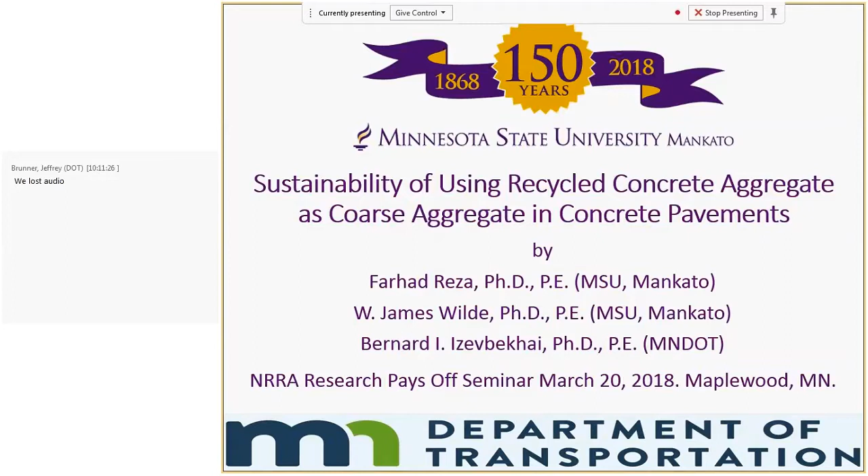So our topic today is of interest to us. It was from this Office of Materials and Road Research, our concrete research section, that we developed the mathematical method for quantifying the enhancement of the interfacial transition zone in concrete, called the aggregate avoidance index method. We developed that from our internal research in recycled concrete aggregate in concrete.

Today, going further, we're going to have a presentation from Professor Farhad Reza from Minnesota State University, Mankato, where he is a professor in the civil and mechanical engineering department. He has been in that faculty for about 9 years now, and prior to that, he was at Ohio Northern University for 8 years. He obtained his BSc in civil engineering from University of Iowa, and his master's and PhD from Clarkson University in New York.

Dr. Reza's research interests include concrete materials science, pavement performance modeling, and non-destructive testing. He is also a registered professional engineer in the states of, I believe, Minnesota, Ohio, and New York. Correct me if I'm wrong. All right, so make welcome Professor Farhad Reza.

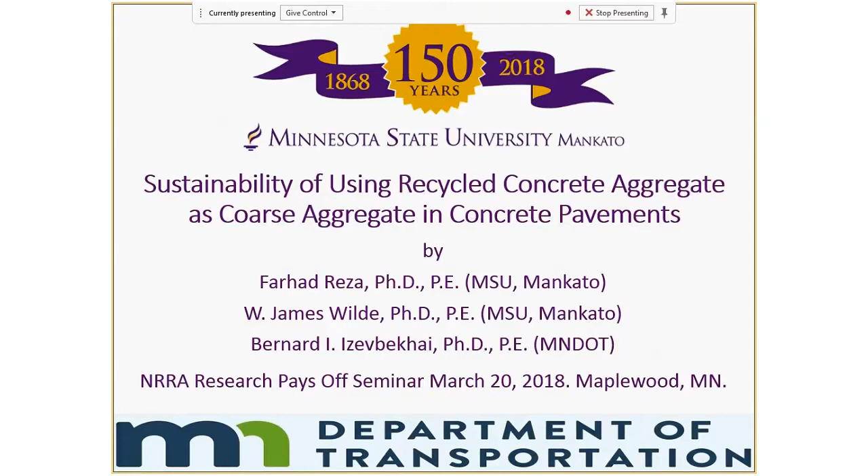Sustainability is at the forefront of everything that we do nowadays. A definition of sustainability, for example, you can see from the Federal Highway Administration's INVEST program, which is a method for rating sustainability of transportation projects. The goal of sustainability is satisfaction of basic social and economic needs, both present and future, and the responsible use of natural resources.

Also, for those of us who are civil engineers, the American Society of Civil Engineers Code of Ethics, fundamental canon number 1, says that engineers shall hold paramount the safety, health, and welfare of the public. And the second statement there is that they shall strive to comply with the principles of sustainable development. So it's an important topic for us.

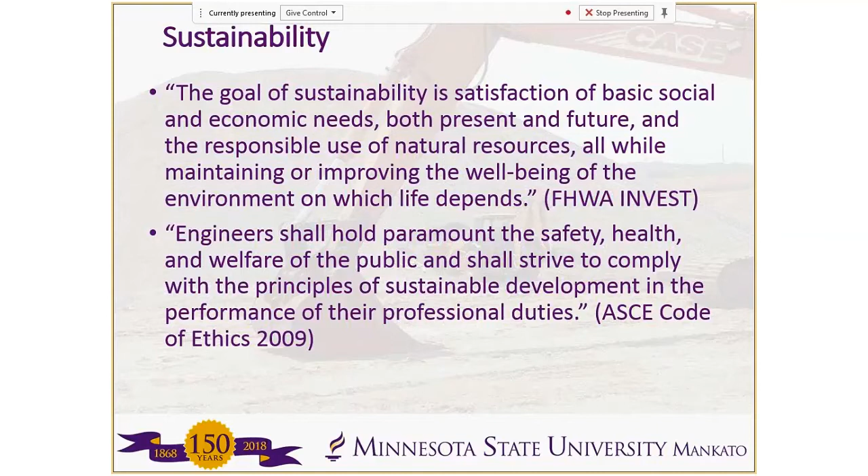ASCE also gives some guidance about what this means. As an engineer, if you want to consider sustainability, what are the steps you should be considering? They gave some guidelines, steps to a sustainable project. Number one is to perform a life cycle assessment from planning all the way to removal, avoid depletion of resources, plan for resiliency, and validate the applications with some metrics or ratings.

Also, one term that's used is the triple bottom line of sustainability, which is economic, environmental, and social performance. This term got coined in the past—big corporations used to report basically their financial statement, so they used to report only the economic performance. But Elkington in 1998 suggested that corporations should also, in addition to the financial statements, look at environmental and social performance. From there, this term came in, the triple bottom line of sustainability.

So in today's talk, I'm mainly going to focus on the economic and the environmental part.

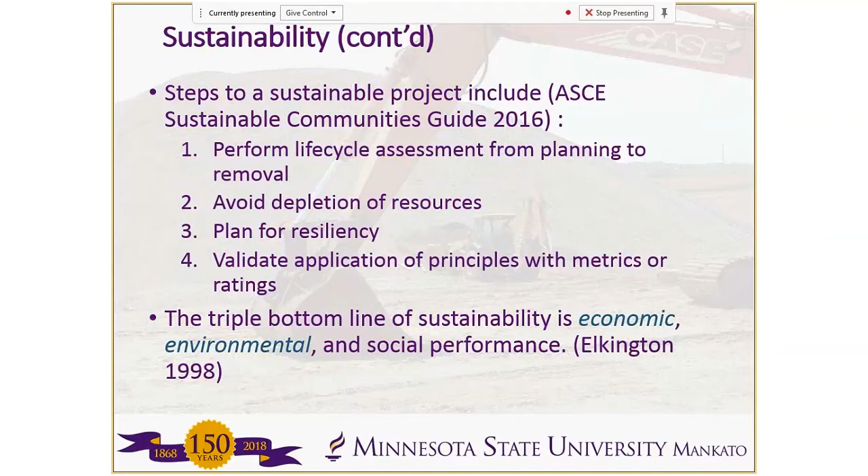The objectives in this project here were to look at several alternatives for a realistic pavement project. The idea was to try to get an equivalent performance between a pavement that's made with recycled concrete aggregate and a pavement that's made with conventional aggregate. We'd evaluate the economic performance of the different alternatives using a life cycle cost analysis, and also look at the environmental performance of the different alternatives using life cycle assessment.

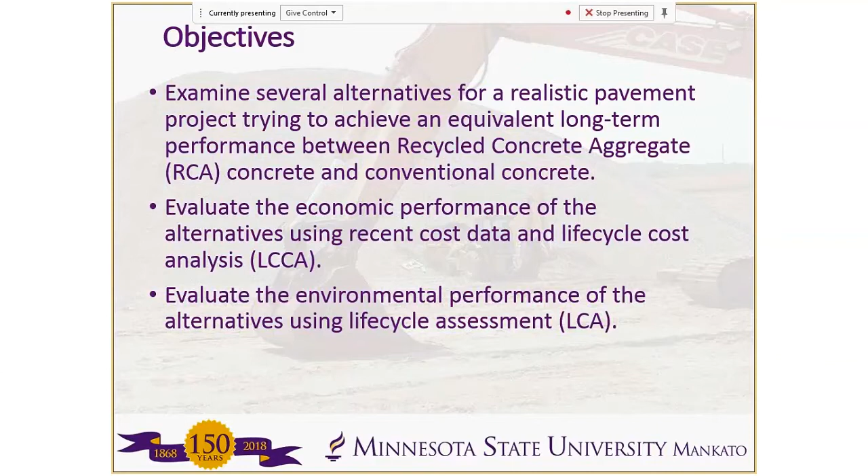Just to give some background, in the US we consume a lot of aggregate annually in construction, about 2 billion tons annually. A common estimate of how much recycled concrete is available as aggregate is about 5%, or 100 million tons, so it could make a substantial contribution to aggregate consumption.

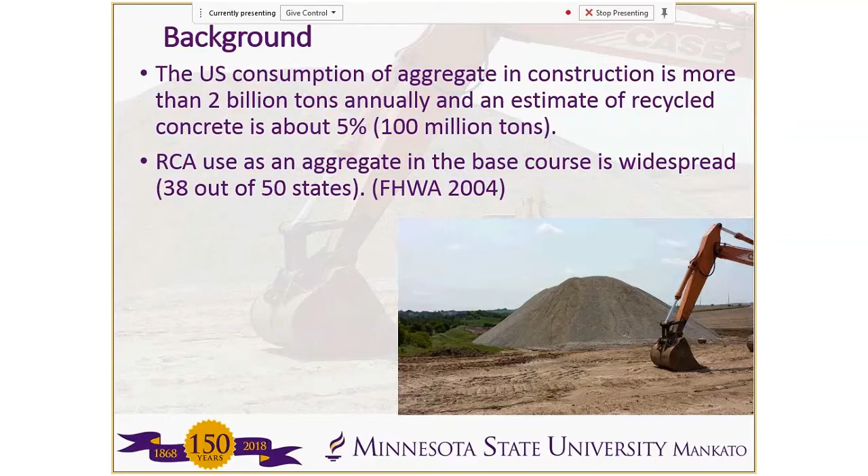It's already a pretty common practice in a lot of states to use recycled concrete aggregate in the base course of pavements. For example, in an FHWA study in 2004, 38 out of 50 states were already doing that practice. But it's not that common to use it in the concrete layer itself.

Back in the 1980s, across the US, there were several trial projects built, and Michigan had the most of them, about 30, but Minnesota was also one of the highest in number of those trial projects. Subsequently, Michigan placed a moratorium on using recycled concrete aggregate in concrete in 1991 because they were observing some mid-slab cracking. Further investigations later on actually attributed it more to design problems like inadequate joint spacing, more so than the actual aggregate issues.

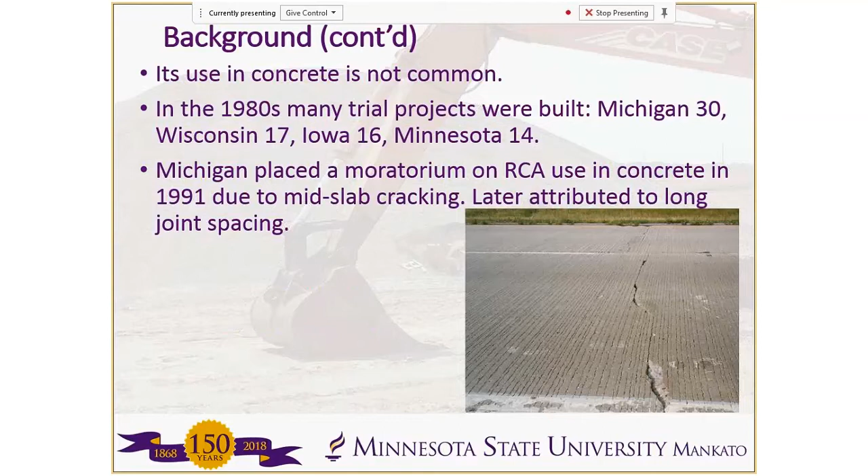One of the more recent constructions was at MnDOT, a two-lift construction performed at the MnRoad facility in 2010. With the two-lift approach, the idea is that you can use a lower quality concrete on the lower lift and a higher quality concrete on the top lift. So a thicker, lower quality concrete with recycled concrete aggregate was placed on the bottom, and a thinner layer was placed on top.

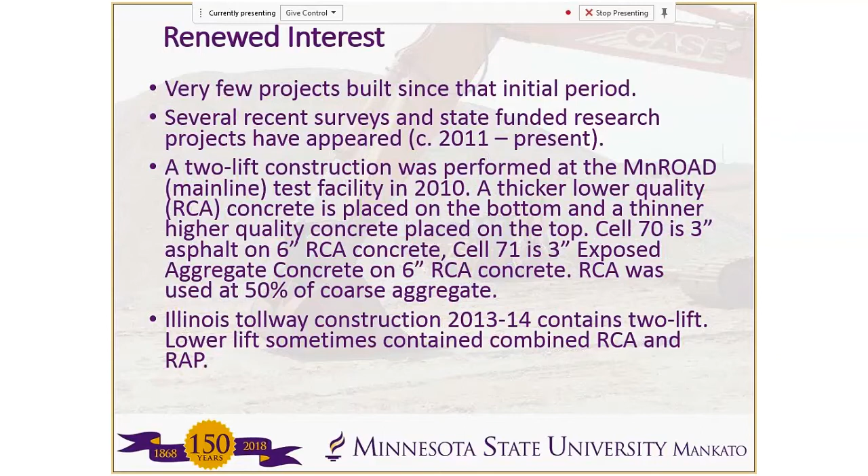Also in the Illinois tollway construction in 2013, that was also a two-lift construction, and in some portions the lower lift also contains recycled concrete as well as recycled asphalt.

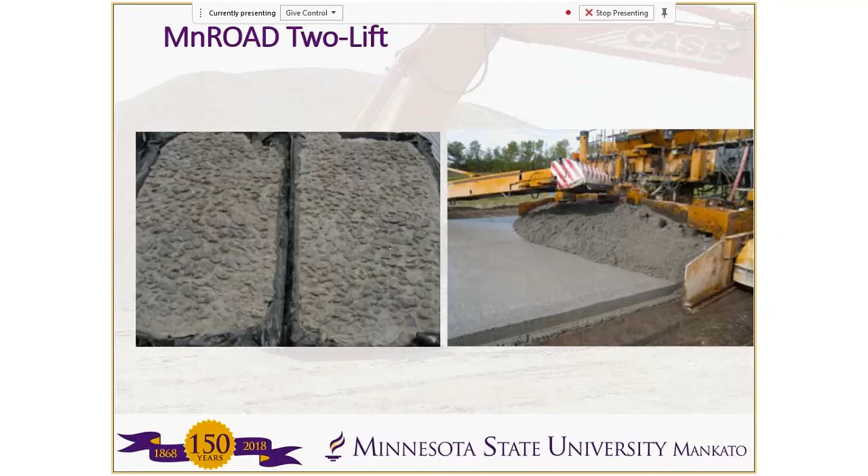The mechanical properties of recycled concrete aggregate have a huge part to play in the performance of that concrete. Most of the literature suggests that you don't use the fines, the recycled aggregate fine material, because that causes a lot of workability issues and some durability issues with the concrete.

Compressive strength of concrete using recycled concrete, what's been reported in the literature, is typically about 20% lower than if you used natural aggregate. But if you're using a lower water cement ratio, the difference might be even more pronounced at a lower water cement ratio.

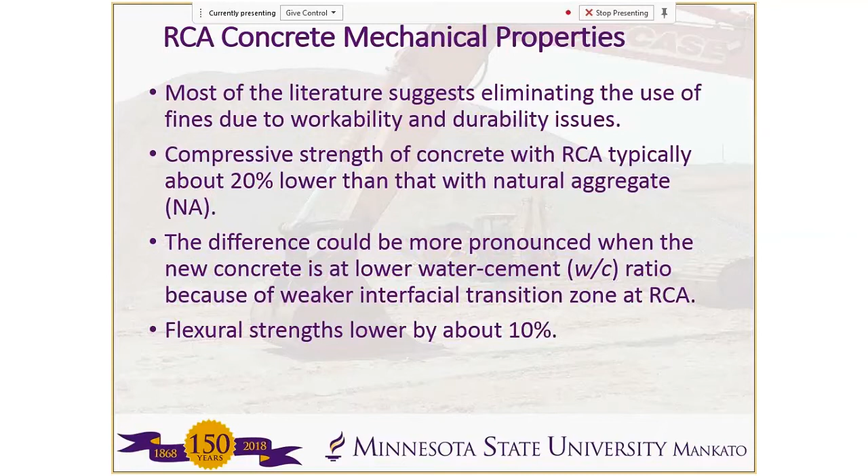Bernard mentioned the interfacial transition zone earlier on - the recycled aggregate already has a weaker interfacial transition zone than new concrete. This could lead to a bigger difference in compressive strength when you have lower water cement ratios. Flexural strengths have typically been reported to be about 10% lower. Modulus of elasticity of the concrete is about 20 to 40% lower, and coefficient of thermal expansion is about 10 to 30% higher with recycled concrete.

On the positive side, freeze-thaw resistance may actually be increased when using recycled concrete because you already have some entrained air within the aggregate itself. Also, when you crush this to a smaller size, D-cracking susceptibility may also be less. ASR potential may be higher with recycled concrete. So in general, most of the mechanical properties seem to show that recycled concrete aggregate would perform not as well as conventional aggregate concrete.

Most of this data and experimentation were done earlier on, mainly in the 1980s, and concrete mix designs have changed quite a bit since then. So we decided to evaluate a high performance concrete mix with a relatively low water cement ratio of 0.37. For the natural aggregate, we used limestone aggregate, cementitious content was 585 pounds per cubic yard, and we used 30% fly ash substitution.

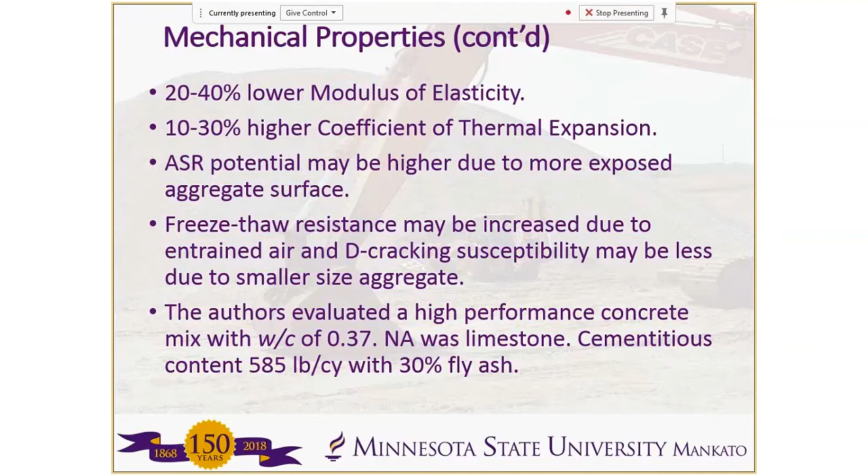The observed mechanical properties from those experiments for 50% and 100% coarse RCA substitution: compressive strengths were about 32% and 43% lower. If you remember, I said if you use lower water cement ratio, you would expect to see more of a difference between compressive strengths. Flexural strength was about 17 to 20% lower. Drying shrinkage was 1% and 32% higher, and coefficient of thermal expansion was 1% and 11% higher.

We also did some other experiments to see if we could adjust the mix design such that the mechanical properties are somewhat similar. We found comparable properties if we lowered the water cement ratio to 0.36 for 50% RCA, and to 0.35 for 100% RCA. We had to increase the cement content slightly so as to keep the paste volume the same.

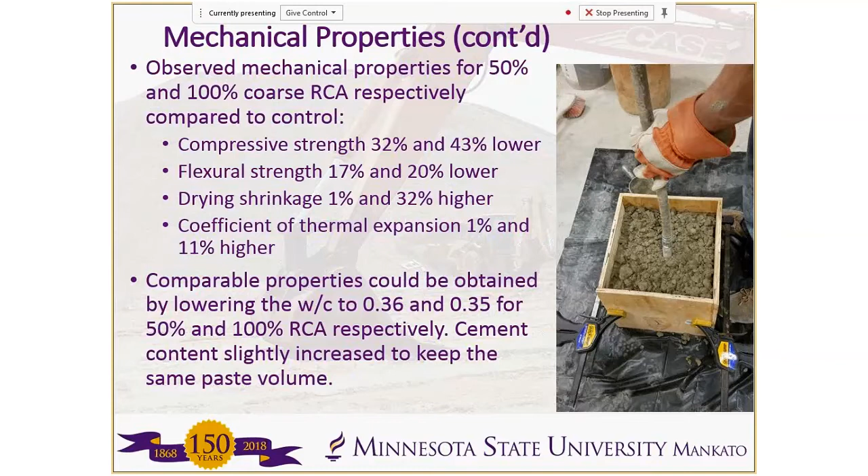So as we've seen, the mechanical properties in general, if you just substitute the recycled concrete aggregate for the natural coarse aggregate, are expected to be inferior unless you make adjustments for that. So we wanted to see, does that hold true in practice?

All these pavements that were built - we had a lot of them in Minnesota built in the 1980s and 90s. We wanted to look at how they performed, look at their long-term performance record, and compare it to similar concrete pavements built around the same time, because we know the specifications change from time to time, so we have to keep it within the same time period. We also looked at the same range of traffic on the pavements as well.

This is a map showing the locations of those pavements with RCA concrete in Minnesota. There's about 212 miles of those pavements that were built.

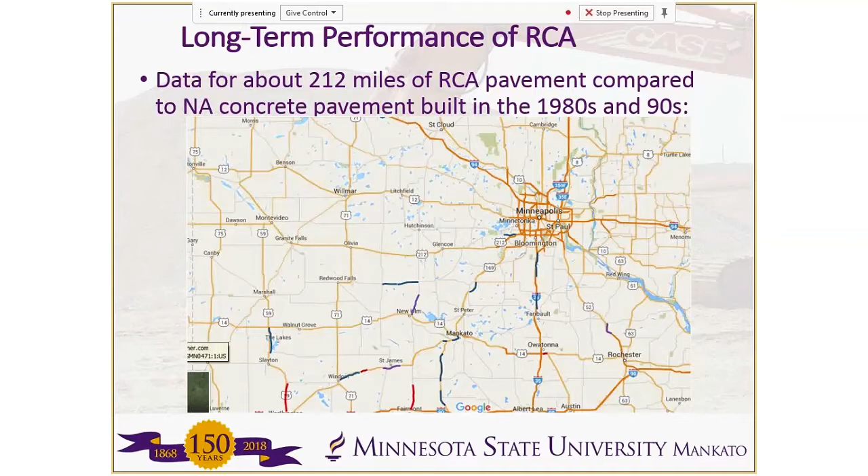So we studied the different pavement performance indexes. MnDOT has a nice database - they collect annual records of ride quality, surface distress, pavement quality, and so on. We tracked those, as you can see on these graphs, looking at those different indexes. This shows the average values over time elapsed since construction, for both the recycled concrete aggregate on top and the conventional aggregate concrete on the bottom.

In both cases, we see the ride quality index is the lower curve, so ride quality tends to deteriorate the fastest out of these indexes. A typical trigger value for major repair is about 2.5 on the ride quality index. So we can see that RQI in most cases seems to be the one that will deteriorate first and cause the trigger for major repair.

Also, just to point out, towards the end it looks like on those graphs there's a slight uptick - it's actually getting better. The reason is that by that time some pavements have already been repaired, so the index values are going up higher, which makes it look as if they're improving with time at the end.

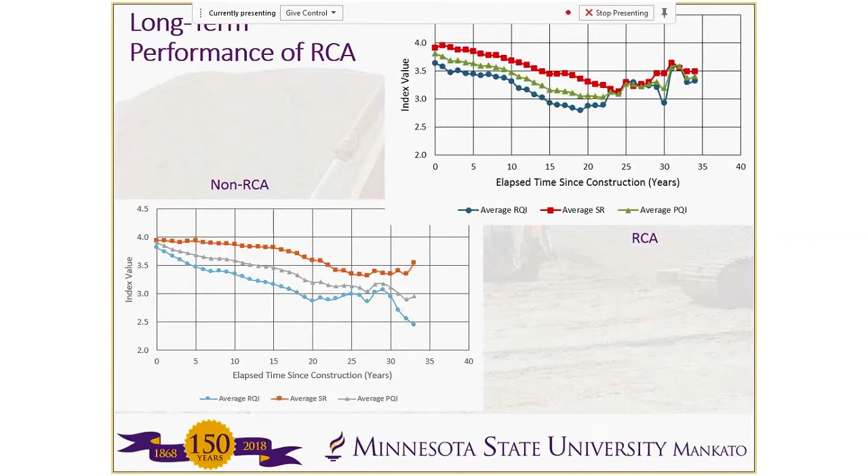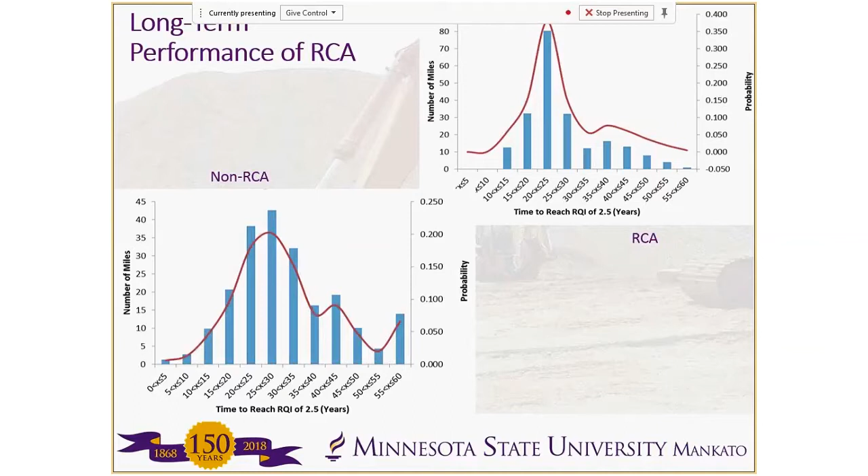So we studied the time it took for the pavements to reach a terminal RQI value of 2.5. As we expected, in general the RCA pavements performed a little bit worse than those made with natural aggregates. Based on those comparisons, the mean time to the first major concrete pavement rehabilitation was about 27 years for the RCA pavements and about 32 years for those made with natural aggregates.

For the minor repairs, we found that by the time pavements get to major CPR, most commonly they undergo 2 minor repairs along the way, and those times were fairly similar for both: 16 years and 21 years for the RCA pavements, versus 18 years and 23 years for the natural aggregate pavements.

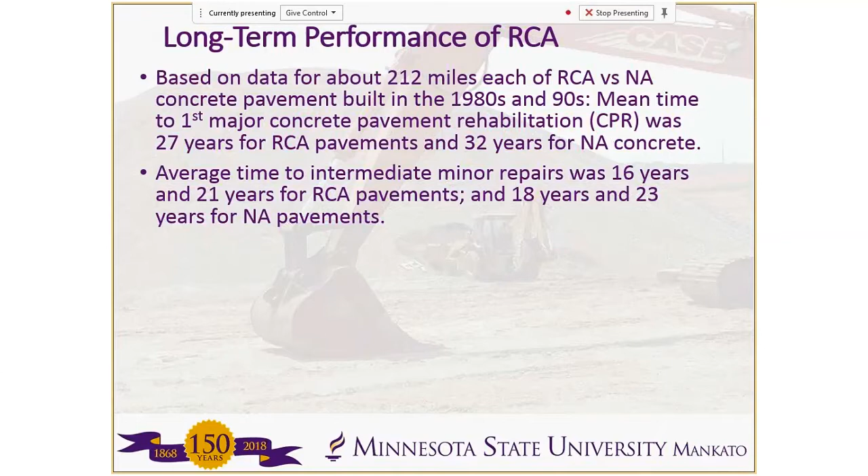Now that we know, based on mechanical properties, if you simply substitute in the same mix design, we don't expect the RCA is going to perform as well. So one option is to carefully control the concrete mix design such that you might get similar performance. Another option might be to actually use increased thickness to compensate for the performance.

So we also looked at this: what about increasing the pavement thickness if you're going to use recycled concrete aggregate? For this, we relied on some fatigue data. As I mentioned earlier, there's a lot of research on static properties, compressive strength, flexural strength, and so on, but not that much research on the dynamic or fatigue properties.

In one paper, we found that the stress level was 0.58 if you're using natural aggregates, 0.56 for 50% RCA concrete, and 0.5 for 100% RCA. The stress level is just the maximum tensile stress that the pavement's going to feel compared to the flexural strength, relative to the flexural strength of that pavement.

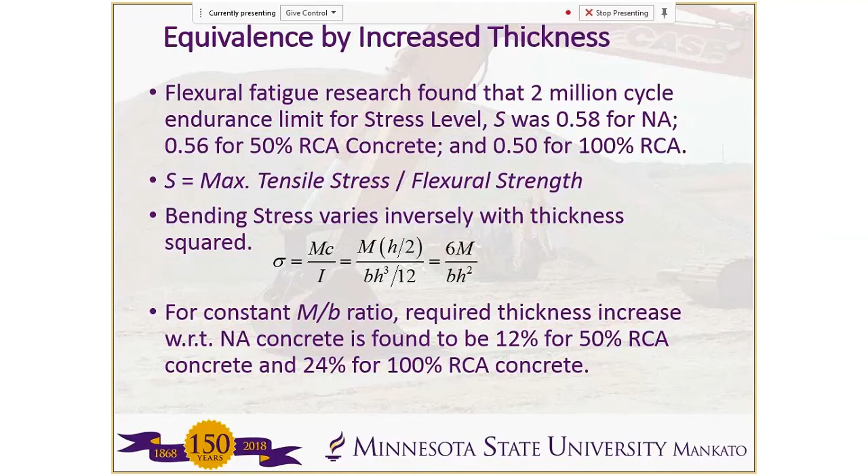Moving on to some of the sustainability aspects, looking first at the economic aspects. Some of the past studies, Florida DOT did an assessment of recycled concrete versus limestone aggregates, mainly for use in base courses. They found a reduced environmental impact in processing energy and disposal, so the RCA had better environmental performance. As far as costs, they found about $12.75 per ton for RCA and $13.20 for the limestone aggregates.

They also assumed a 30-mile haul distance. Also, RCA was found to leach less harmful and less toxic amounts of chemicals than the limestone aggregates.

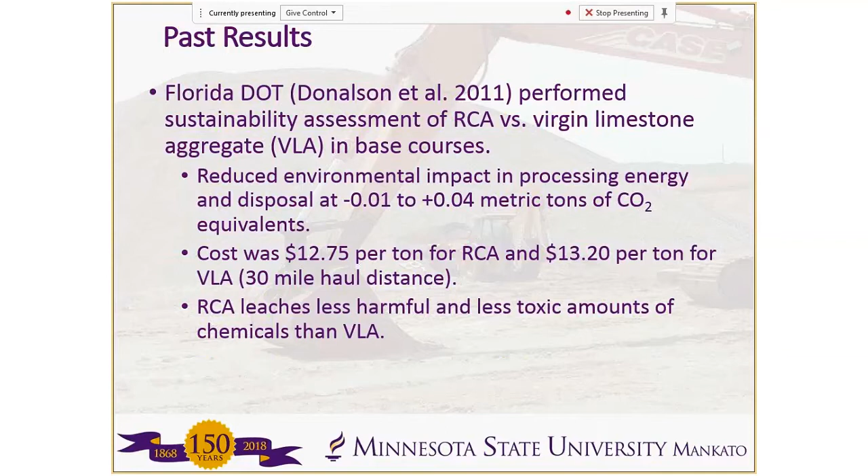Michigan DOT also performed a study, a lifecycle cost analysis for RCA versus natural aggregates. If you remember, Michigan was one of those states that had the highest number of trial projects with RCA. They found that for level 1 pavements, which they define as less than 6,000 AADT and approximately 9 inches thick, the cost was the same between the two types.

The cost was about $15,000 on an annual worth basis. For level 3, the cost was actually less for the RCA: $12,170 for the RCA versus $14,600 for the natural aggregate. So their analysis is showing a better economic value using the RCA concrete.

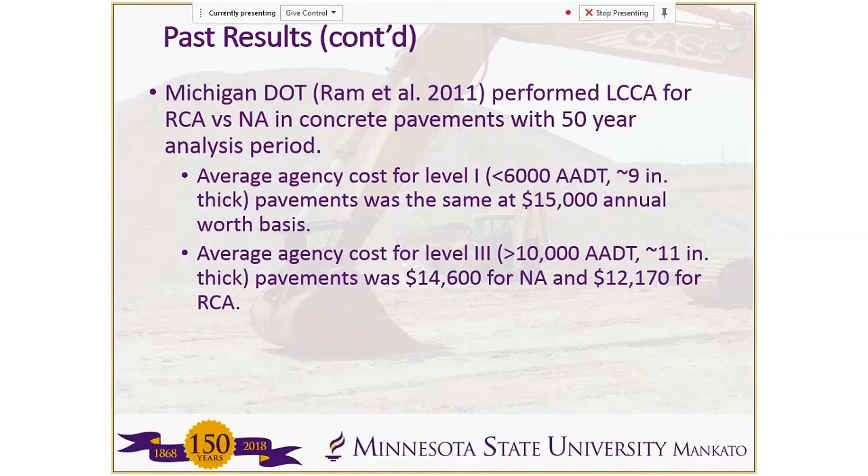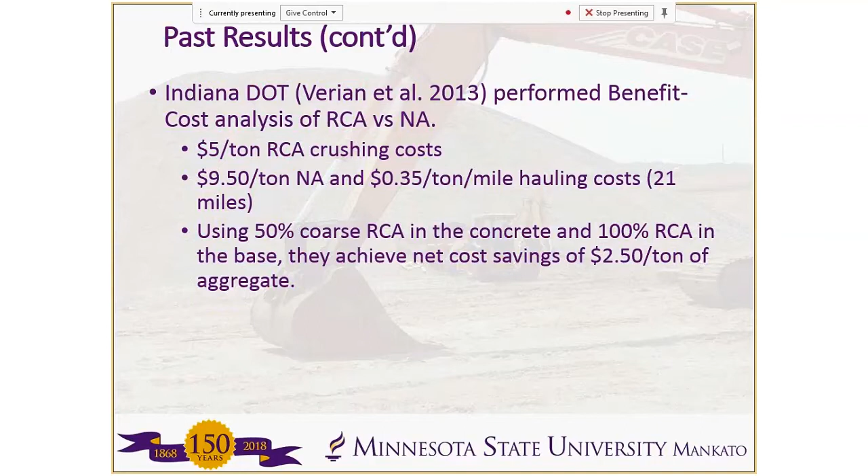Indiana DOT also performed a benefit cost analysis looking at recycled concrete versus natural aggregates. Some of the assumptions in their analysis: they assumed $5 per ton for the RCA crushing costs, $9.50 for the natural aggregates, and 35 cents per ton per mile for the hauling cost. Using these scenarios, they came up with a net cost savings of $2.50 per ton of aggregate when using the RCA versus the natural aggregates.

Also, with two-lift construction, as I mentioned, that's one approach done in Europe, and we're starting to try that out here in the U.S. As I mentioned at MnROAD, that was one of the places we did the two-lift construction. Texas DOT actually did a study, mainly economic, looking at two-lift construction in the U.S. They surveyed several contractors about their process and found that contractors would prefer to add a second batch plant, for the aggregates used in the upper lift and for the RCA for the lower lift.

Also, with this type of construction, you need a second slip form paver, so equipment costs are going to be increased, labor costs are going to be increased. However, overall, these constructions still came out cheaper compared to conventional concrete because of savings in material costs, which offset the increased construction costs. For example, in the Minnesota construction, the conventional concrete cost about $20.38 per square yard, whereas the two-lift construction was $19.94. So it actually came out cheaper despite the increased construction costs.

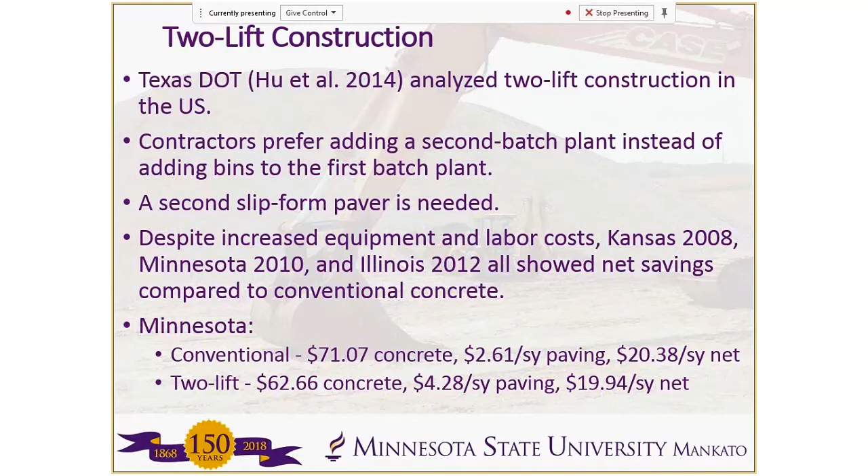In our life cycle cost analysis, this was the basic scenario. When you do LCCA, you're supposed to assume a relatively long analysis period, so we looked at 50 years. The real discount rate we used was 1.5%, which was the recommended value from OMB.

Because we're looking at different concrete mix designs, we have to break down the concrete mix into its components. We can't just take a lump sum value for the concrete costs. So the concrete mix was broken down into its components.

We realized that there's some economy of scale. If you're doing a large project, unit costs will be a little bit less. So we assumed a 7-mile long project.

The old concrete pavement to be recycled was assumed to be 24 feet wide by 10-inch thick. The base of the new concrete pavement to be placed was 24 feet by 8-inch. The new concrete pavement was assumed to be 24 feet wide by 9-inch thick. For haul distance for the natural aggregates, we assumed 30 miles.

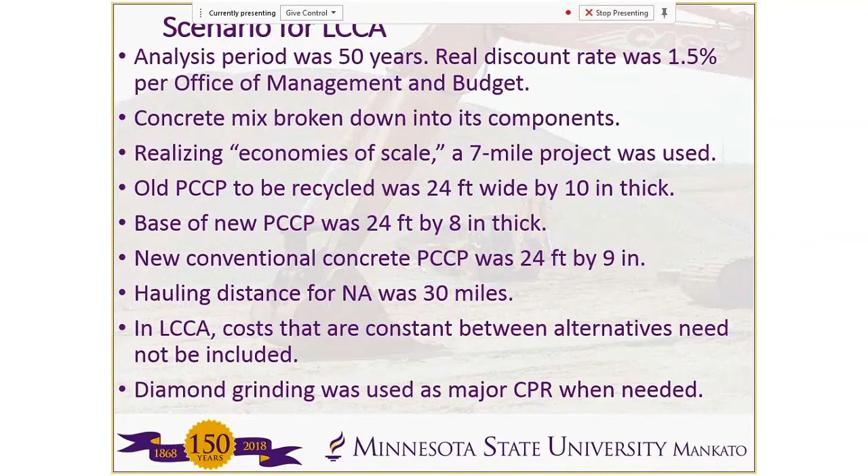For this economic analysis, we looked at 8 different alternatives. Number 1 was basically our control, conventional concrete pavement without any RCA.

Based on our discussions with some MnDOT personnel and experience, remember those pavements in the 1980s were built with a much higher water cement ratio. Nowadays, typically we're using much lower water cement ratios. So the expectation was that these should be able to go a long period of time before needing a major CPR. We assumed 59 years until the first major CPR.

The next 2 alternatives had 50% coarse RCA in the concrete. The third one was a thicker design—one method you can use to try and get equivalent performance is to make the pavement thicker, so in number 3 we had a 12% thicker design. Number 4 was also 50% coarse RCA, but here we lowered the water cement ratio to try and get equivalent performance with the conventional.

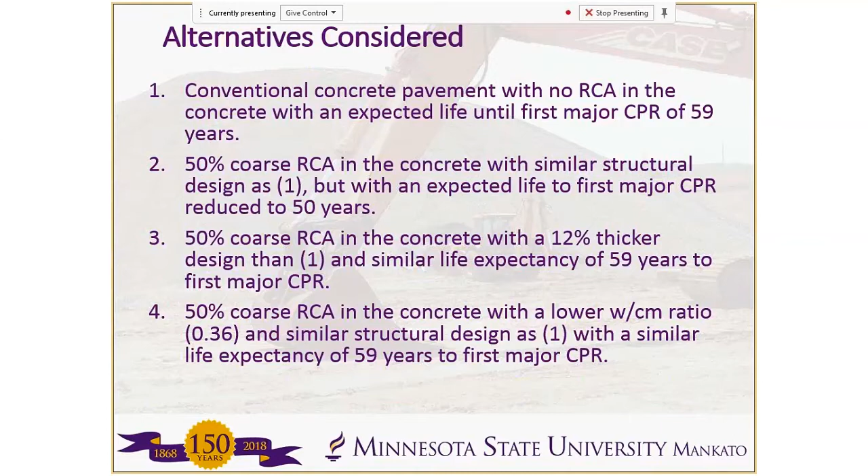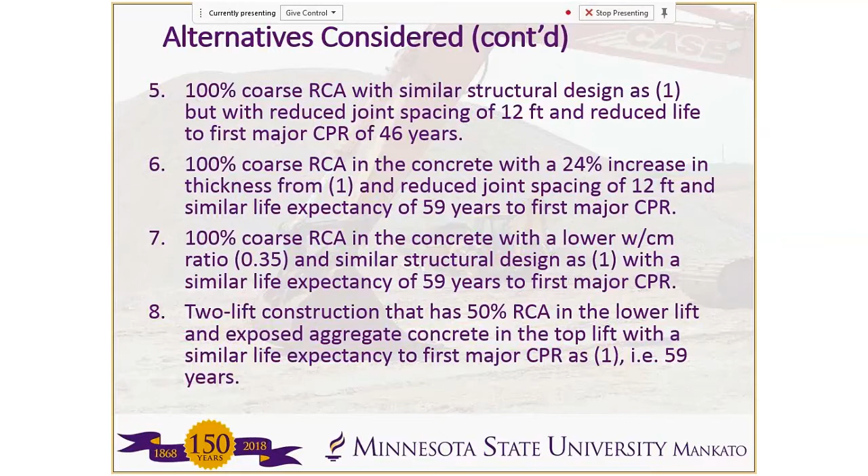We also took a look at the economic analysis using the mix designs that were used in the MnRoad two-lift construction. We had those mix designs available, so we also included that in our economic analysis.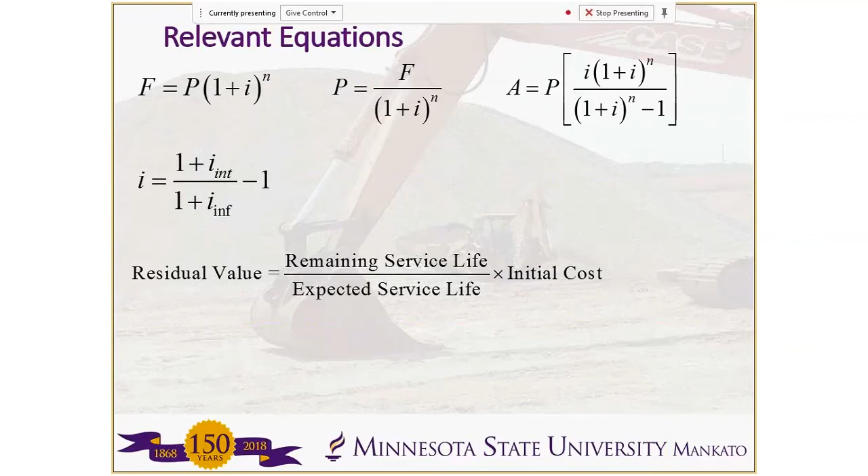This shows some of the relevant equations for the analysis. When doing life cycle cost analysis, you can look at future costs, present costs, or annual worth basis—that's showing the conversions between them, using the real discount rate. If at the end of the analysis period some pavements have not yet reached the major CPR, that means they have some residual life. So remaining service life can be taken into account with the residual value: remaining service life over the expected lifetime, times the initial cost.

Also, since we had to break the concrete mix down, we tried to break it into cement cost, fly ash, water, and even water reducer costs as well. For the haulage, we assumed 35 cents per ton-mile.

We looked at some different options with the joint spacing as well, so we had to also include saw cut costs and dowel costs.

For the two-lift construction, because of the increased labor and so on, we have a premium for the two-lift construction, which we found was $1.66 per square yard. And for major CPR, like I said, we assumed diamond grinding for major CPR, and the cost was $2.30 per square yard.

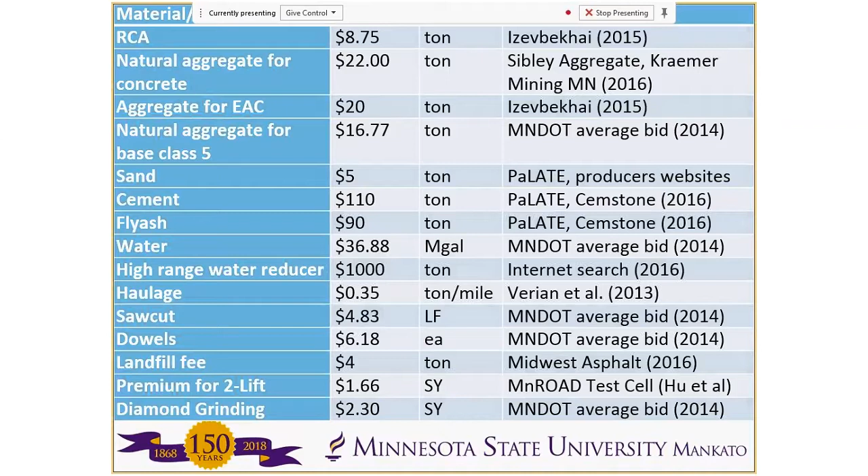Typically, when you crush old concrete pavements, you get about 40% fines and 60% coarse. So the amount of usable concrete aggregate was about 60% from crushing. We had old concrete pavement which we assumed was crushed up, so about 60% could be used as coarse aggregate. The remaining is fines, which we're not going to be using in the mix.

Typically, on a realistic project, when you crush up an old pavement, the amount of RCA that you're going to get is not enough to do both the base course and the concrete pavement. MnDOT allows up to 75% recycled RCA in the base. So in round one, we assumed that priority was given to the concrete pavement. When you crush up the old concrete, first you put it in the concrete pavement, then if anything is left over, it would be put in the base. This was the assumption in round one of the economic analysis.

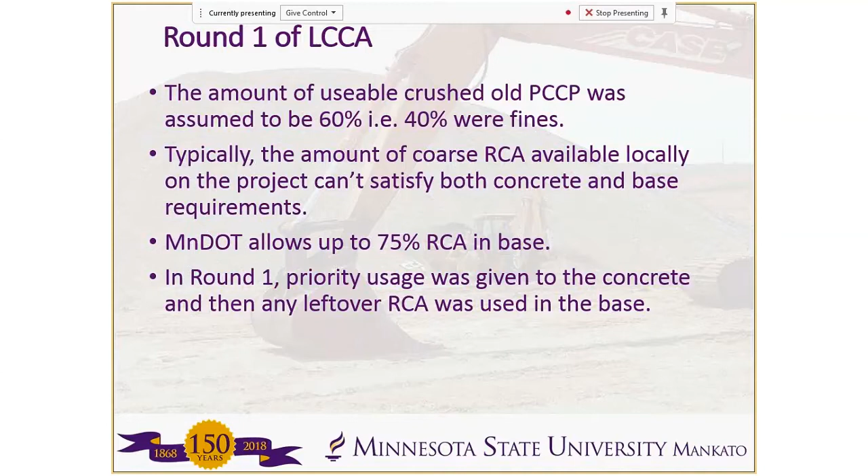We searched and found that some aggregate suppliers were actually selling excess stockpiles of recycled concrete aggregate as a base aggregate at a significantly cheaper price, $5.25 per ton versus $16.77 for natural aggregates.

When we found that, we did a second round of economic analysis. As before, we assumed that when you crush up the pavement, the contractor would put that in the concrete pavement first, and anything left over would go in the base. But now the contractor could actually purchase extra RCA from offsite to maximize the amount of RCA in the base course as well, since MnDOT allows up to 75% RCA in the base course. When you do this analysis, buying extra RCA to bring the RCA content in the base up to 75%, it favors the use of RCA even more.

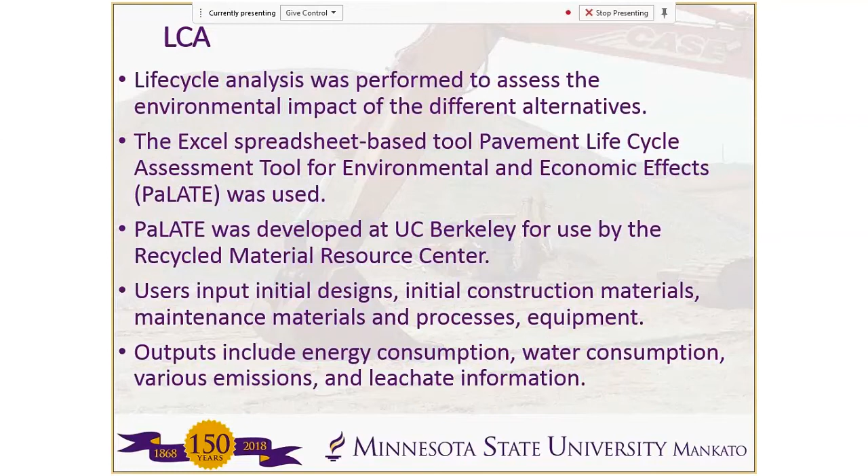When we compare that with conventional concrete, we found that for energy use, it's favorable for the RCA. Some of the emissions are reduced, and particularly the hazardous waste generated and the human toxicity potential decrease when we use the RCA concrete.

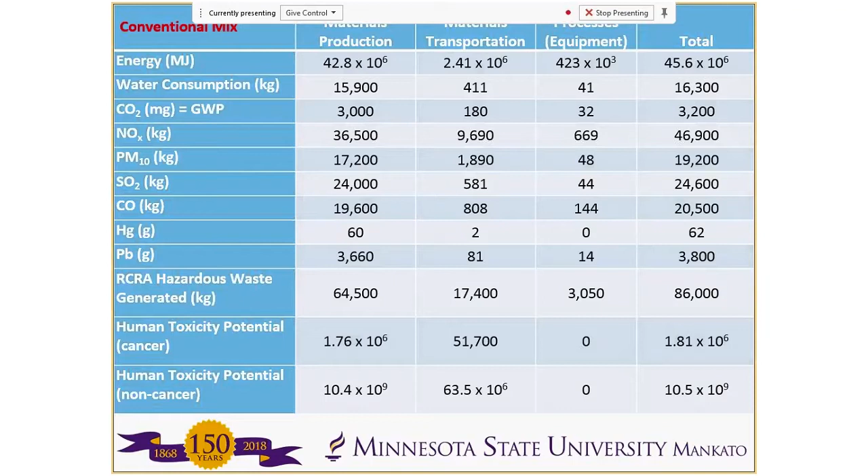So in conclusion, the long-term performance of the recycled concrete may be worse than natural aggregate concrete if you just use a similar mix design and a similar structural design. So to compensate for that, you can make some changes at the initial design phase.

One option might be thicker pavements with RCA. Another option might be using a lower water cement ratio and a higher cement content. The life cycle cost analysis supports the option of changing the mix design rather than increasing the thickness of the pavement.

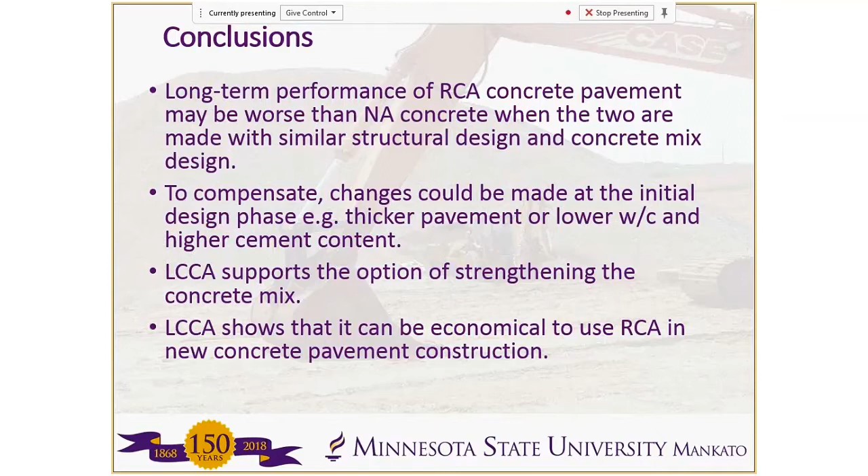LCCA showed that it was economical to use RCA in new concrete pavement. That turned out to be the most economical alternative, which also makes sense because natural aggregate for concrete is usually a higher quality than the base natural aggregate. So if you can use the RCA to substitute the aggregate in the concrete, it should make good economic sense to do that rather than for the base course.

We found that at current rates, you can purchase extra RCA for a relatively cheap price. That makes the project even more economical.

Using life cycle analysis, we showed that there's some reduced energy consumption, reduced emissions, and decreased human toxicity potential for the RCA concrete. Also, it's pretty widespread to use RCA in the base course, but some places are reporting problems with leachate, calcium carbonate, called tufa, when this is used in the base course. So if you use the RCA inside the concrete, that will tend to decrease this problem because it will be encapsulated within the concrete.

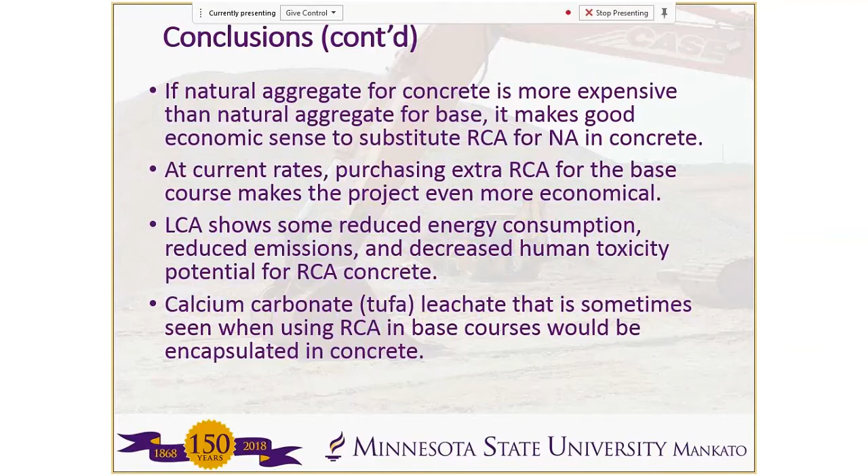This research was funded by the Minnesota Department of Transportation, and during the research we had to partner with several members of the National Road Research Alliance. So I thank you for your time, and I guess we can have questions now.